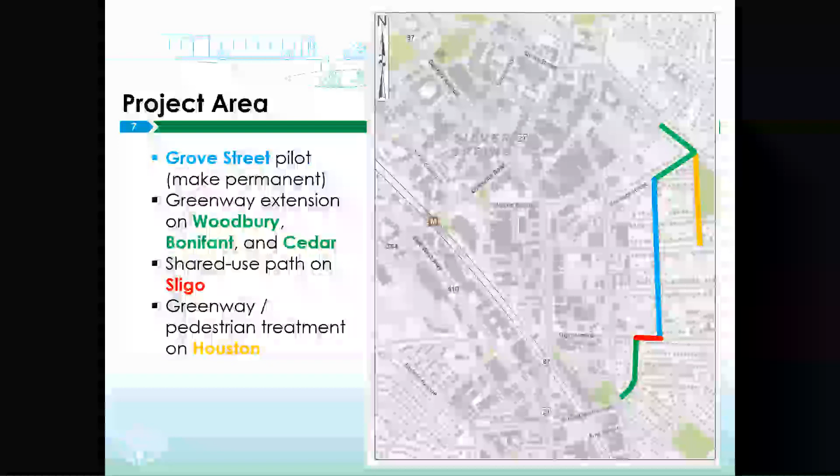And there's a segment along Sligo Avenue, which would be a shared use path, not a neighborhood greenway. It's part of the neighborhood greenway corridor, but it won't be a shared facility where you're biking in the street. You'll be on the side of the street.

And then we also have included a sidewalk along Houston Street based on comments that we have received throughout the length of this project. So I want to point out that this is part of a growing network in Silver Spring. This is not an isolated piece of the network, and this is not just a bike project, it's a bicycle and pedestrian project. But I want to talk about what's happening throughout Silver Spring.

So we already have a network of separated bike lanes and other facilities that have been built largely on the north side of downtown. You can see the Spring Street, Cedar Street separated bike lanes along the northern edge of downtown, which do connect at the north end of Cedar Street, in the neighborhood at least. And also the separated bike lanes along Wayne Avenue and 2nd Avenue that get you over towards Silver Spring Metro.

In addition to that, there are projects that are under construction. The Capitol Crescent Trail from Silver Spring Metro to Bethesda and the Silver Spring Green Trail, essentially from Whole Foods out to Sligo Creek, are being constructed as part of the Purple Line project. Those will provide off-street trails in the case of the Capitol Crescent Trail and separate right-of-way, and in the case of the Silver Spring Green Trail, next to Wayne Avenue.

And the Metropolitan Branch Trail, you can see at the bottom, from Silver Spring Metro down to Montgomery College, under construction, which will help to connect the existing segment of the Metropolitan Branch Trail, which is just at the very bottom of your screen, that solid line there, which goes down as far as the DC line. The Metropolitan Branch Trail will eventually provide an off-street connection all the way to Union Station in Washington, DC.

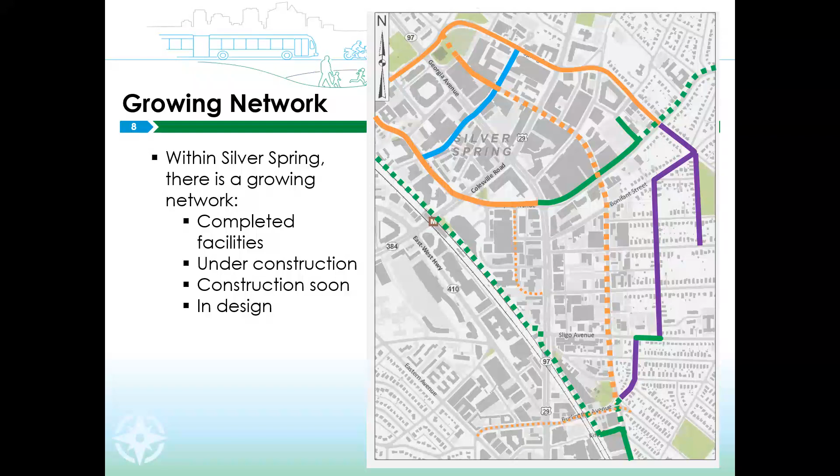And then we have some additional projects along Dixon Avenue and from Wayne Avenue down to Silver Spring Avenue, and along 13th Street and Burlington Avenue, which are in design, which will help to connect additional parts of downtown Silver Spring to the low-stress network that's being constructed.

So I see you're taking pictures.

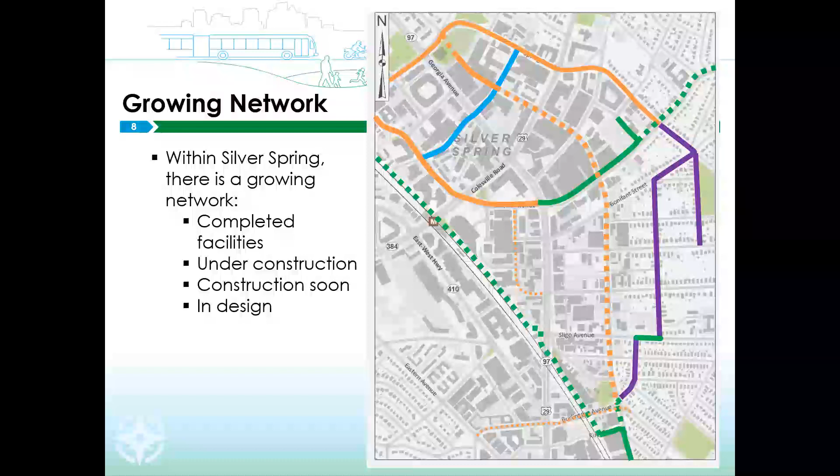That's great. These are all available on the webpage as well, so if you want to download later, you can get high resolution, but it's also not a problem to take pictures. That's kind of an overview of what's happening outside of the neighborhood and how this connects to it.

So a neighborhood greenway, what is it? You've seen this slide many times if you've been involved in these meetings. I always include it though, because we do have new people who join. A neighborhood greenway is a street designed to give walking and biking priority and reduce vehicle speed and volume. The tools we can use to create one include signs, pavement markings, speed countermeasures, and volume management measures to discourage cut-through trips by vehicles, and to create safe, convenient crossings of arterial streets for bicyclists and pedestrians.

Some of these elements you will be seeing as part of the East Silver Spring Neighborhood Greenway. And I apologize, every time someone joins this meeting, these meeting controls appear, and I can't do anything to stop that.

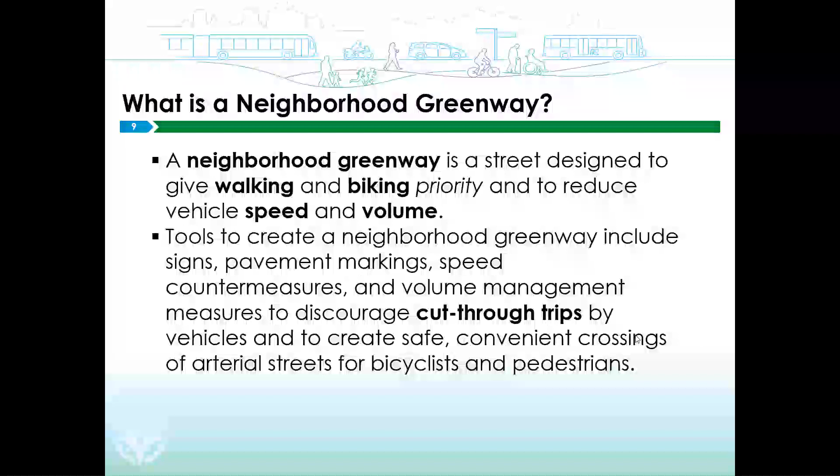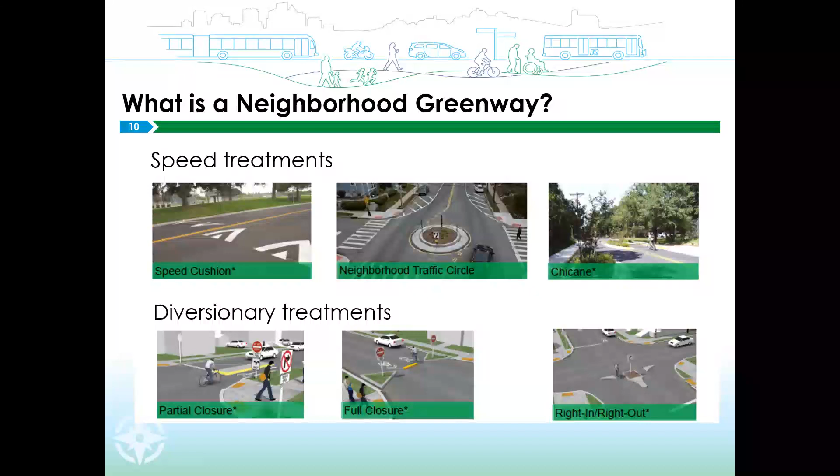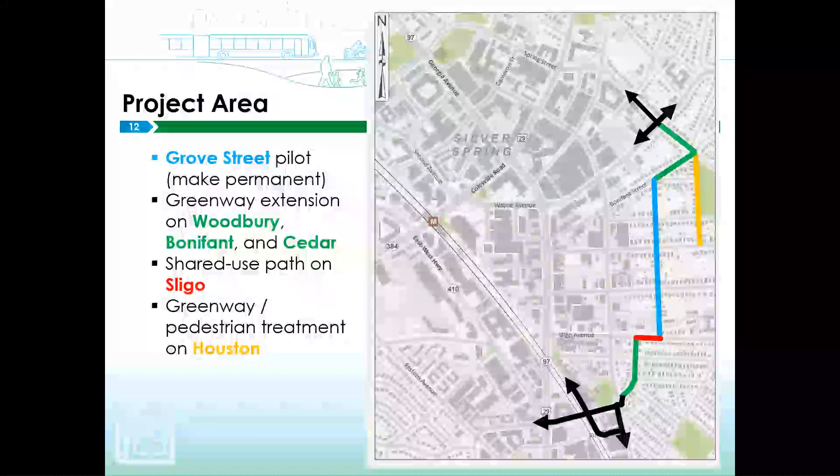As we go over what the project includes, here's the segment, illustrated in black, showing the connections at the south end to the Metropolitan Branch Trail and the Burlington Avenue Bikeway, and at the north end to the Silver Spring Green Trail and the Spring Street, Cedar Street separated bike lanes. I'm going to start at the south end of the project and walk our way north to go over what you're going to see.

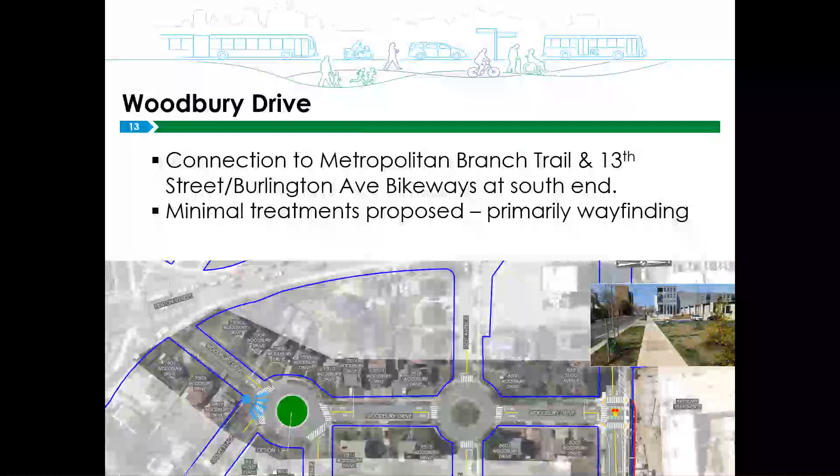All of these slide presentations are on our website, and all the display boards are on the website as well. But if you're here in the meeting, you can see those by walking over to your right side of the room and looking at those. And again, we'll be available to talk after the meeting.

So Woodbury Drive runs from Fenton Street up to Sligo Avenue here. It's about three short blocks. Mostly what we are proposing along Woodbury Drive are signage and wayfinding treatments—basically bike route signs and maybe some sharrows that help guide bicyclists through the neighborhood.

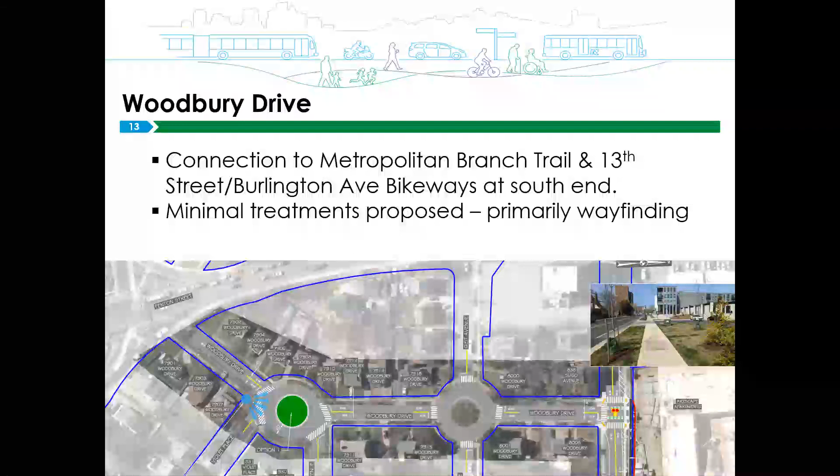We are proposing that the big open space at Violet and Woodbury and Richmond be converted into a circle to help rationalize that space and make it a little less chaotic. That's one of the options—we do have another option as well. So here is that potential circle treatment, made a little bigger for you on the screen.

You can see we still have plenty of space for drivers to circulate, but there would be a green space to help break that up. Right now, because the streets come in at different angles, it might be a little confusing for someone going north on Woodbury Drive who wants to continue on Woodbury Drive, while someone going south is turning onto Violet Place. It might be confusing as to where exactly you should position yourself, because you're coming in at different angles—it's just a big wide space.

We know from research that big wide open spaces encourage faster driving, and it's just not well marked. So we feel like a roundabout might be one way to help reduce the amount of space there that has pedestrians and cyclists open to exposure.

However, we have heard some people in the neighborhood who are not happy about the idea of a roundabout or circle there. So one alternative would be to take that space and, instead of putting the green space in the middle, put it on the edges, making it sort of like a normal street through here with two closely spaced intersections. We could potentially use the outside for stormwater management best practices. I want to point out that impervious surface is a major impediment to the health of places like Sligo Creek, because all that water that falls on pavement runs directly to the creek.

I know you may see it going to a storm sewer, but those storm sewers go directly to Sligo Creek. They don't go to Blue Plains to get treated. They just go downhill, so trying to treat that water and reducing the amount of water will help reduce erosion and will help reduce flooding events in Sligo Creek. I know this is just a small piece, but every little piece we can do helps reduce our impermeable surface. So that's one of the options.

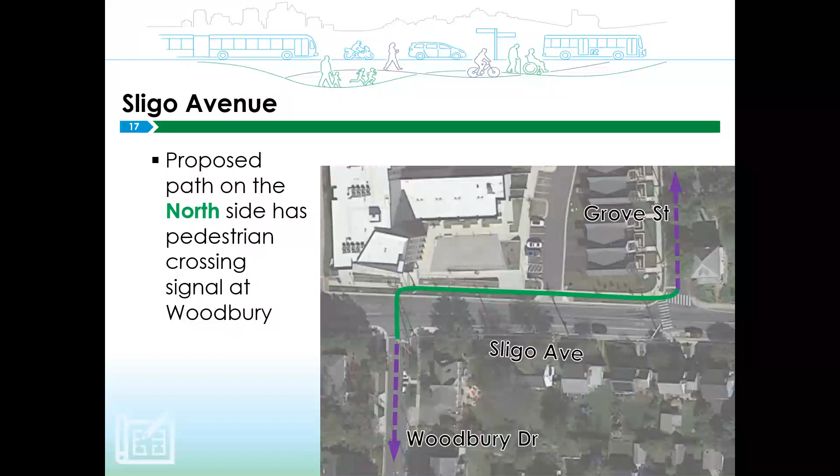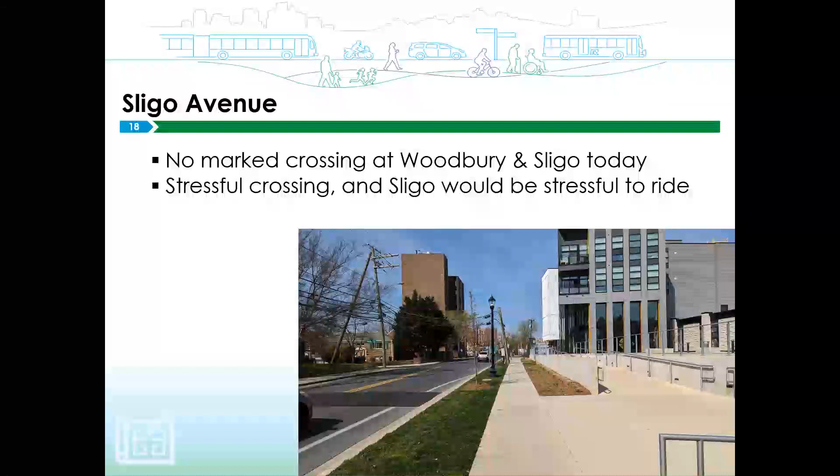And this is a picture that shows the existing condition along the north sidewalk. You can see we have the new ArtSpace development where the police department used to be, and a relatively narrow sidewalk on the north side of Sligo Avenue. We're proposing to widen that so there's enough space for cyclists and pedestrians to share to get between Grove Street and Woodbury. You can also see in the rendering there's a signal shown at Woodbury Drive.

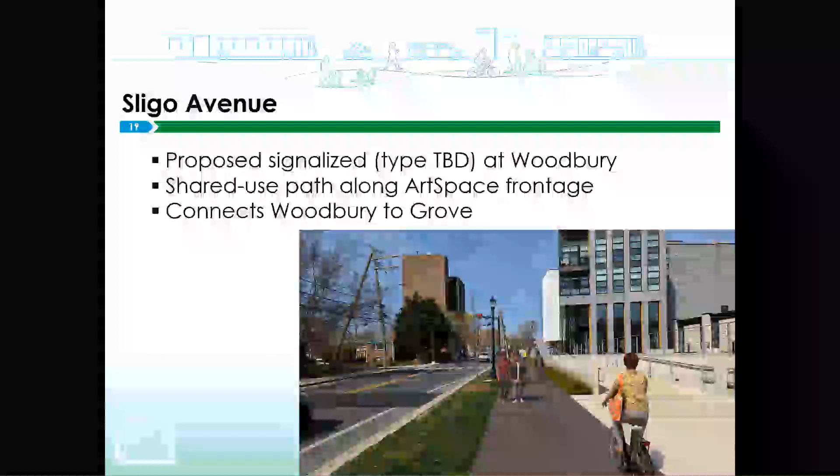As we move further north to Grove Street, we heard a lot of support for many of the treatments that were piloted there, especially the walking lane, which is very popular. So we're proposing to make the speed humps, the choker - there's one choker north of Easley Street - and the curb extensions on the side streets permanent. They're currently done with paint and flex posts on the east-west streets; we want to make those permanent and also create a permanent walking space.

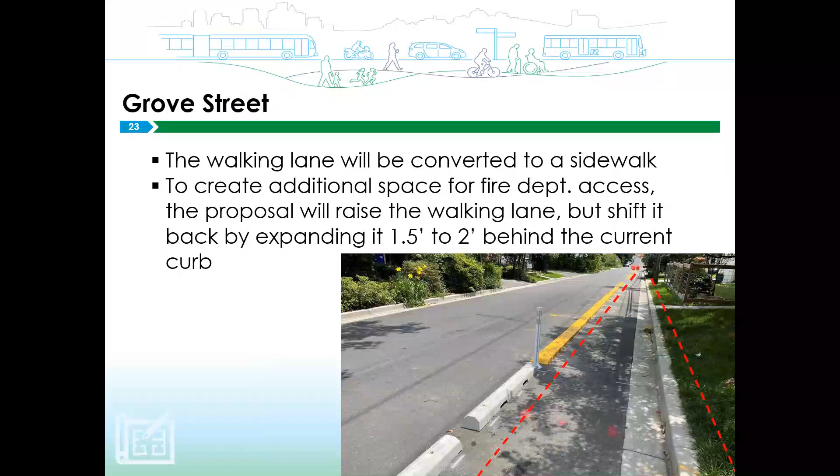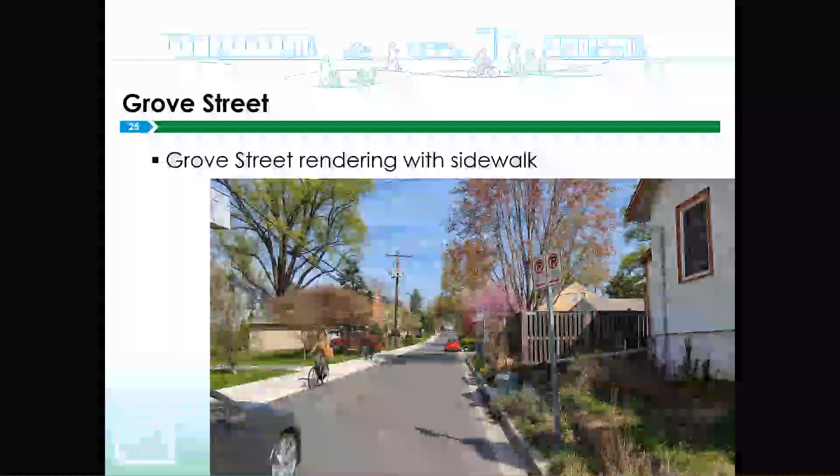But we'll have a raised sidewalk that is much harder for people to drive on than the current walking lane is. I won't say impossible, because where there's a will, there's a way, and SUVs make a lot of things possible. So this is just a rendering or a picture showing Grove Street as it is today. Well, not today because it's dark and cold, but at some point recently. And then a rendering showing what the sidewalk could look like on the west side of Grove Street.

As we move further north up to Bonifant Street, this is where we have the choker that I was mentioning here. The reason we installed the choker, which is currently paint and flex post, we're proposing to replace with concrete, is Grove Street's pretty narrow when there are parked cars. But when everyone's at work and there aren't any cars on Grove Street, it's wide enough that people can go pretty fast. And so the idea of the choker here is just to have at least one place where you have to slow down, yield to oncoming traffic if there is anyone coming southbound or northbound, depending on who gets there first. So it's just a way to kind of keep the street narrow even when there aren't parked cars there.

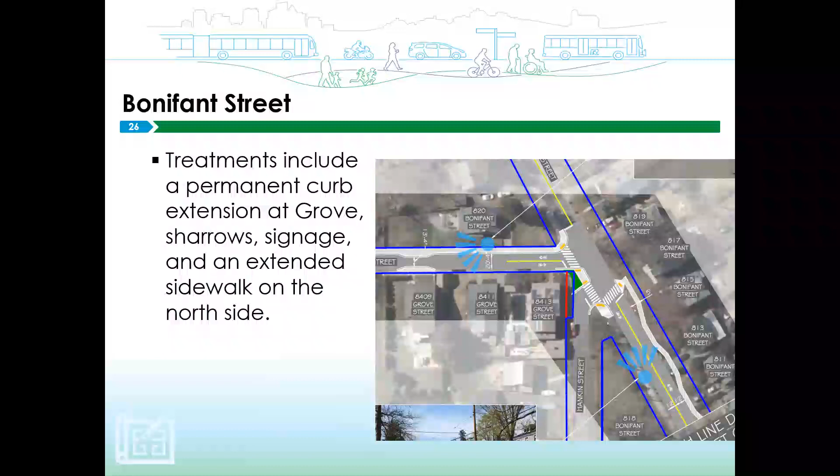We also are showing an extension of the northern sidewalk along Bonifant Street from where it currently ends, kind of mid-block, down to the intersection of Grove Street. We're not showing it continuing further west because there's a pretty big tree at the north end of Grove Street that we don't want to remove. And then we are proposing to make the bump out at Hankin and Grove and Bonifant permanent. And I have a rendering of it on the next slide here, so you can see what it looks like today. Before, this is all just wide open. And we did add the paint and flex post bump out here, curb extension here.

We have heard some people say, oh, well, people turning right drive through the crosswalk to get there. And I'm sure that does happen. That's part of the hazard of doing interim treatments, is it's a little harder to prevent either intentional or unintentional bad behavior. But by building a real curb extension there, it will become pretty clear that you're not supposed to drive there. Again, where there's a will, there's a way. Or I like to say I have 2 really amazing cats. Cars are like cats. If they fit, they sit. I'm sure you all live in an urban area. You're familiar with that. Wherever cars will fit, you'll find them parked.

So we have heard some concerns about people being able to turn from Grove onto Hankin. We've done some what's called AutoTURN analysis to show that it is possible. We understand those concerns, and if it's really a challenge for you, I would encourage you to drive around to Houston and come in Hankin that side, because this pedestrian exposure is really, really long. So if you're walking across it, it's a very long place to just feel like, hey, a car could just whip through here and not even see me. Especially on a night like tonight, it gets dark at 4:30, 5 o'clock in the winter.

I had to dress up. I'm wearing navy slacks and a black wool coat.

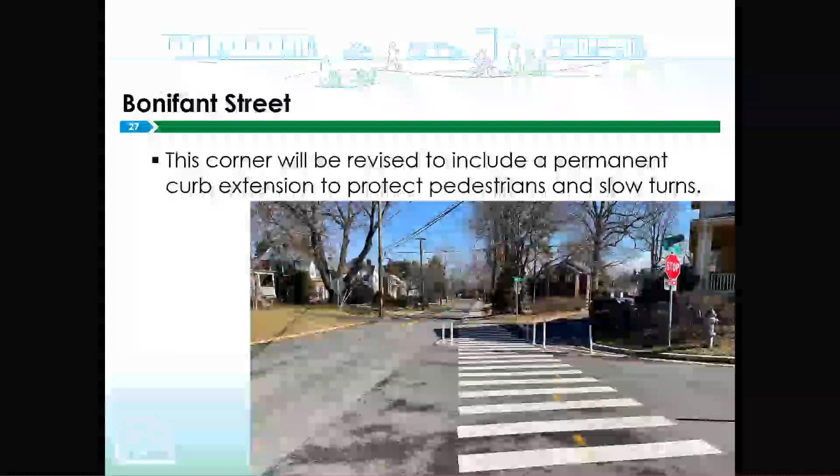I actually put my vest that I wear when I go out for field work, I put it on today because it's dark in some of these neighborhoods. And so that's a lot of exposure that we want to try and reduce.

As we get to the Bonifant Cedar intersection, this intersection is a very odd intersection with 5.5 legs if we count Dartmouth. And so we're proposing to put kind of an oblong roundabout. There's more space in this intersection than there is at the Silver Spring Grove intersection, so this one should function better. This will be a mountable, what we call an apron, a mountable apron. So trucks and buses would probably have to drive at least partway over this, but cars certainly wouldn't feel comfortable to do it. Of course, again, where there's a will, there's a way, you can.

But we have seen some bad behavior here, drivers running the stop sign, and the visibility here is really poor if you're coming down Bonifant. And so this is just meant to encourage people to at least slow down, hopefully stop, but at least slow down at this intersection. And so that's what we're proposing there. It'll be a little different than what you currently see at Grove and Silver Spring.

When we get to Cedar Street, we are proposing to flip the parking to the east side of the street. It's currently on the west side of the street. So the current setup is we have a northbound travel lane, then a southbound bike lane, and then northbound parking. And so that means if you're biking southbound on Cedar Street, you're kind of sandwiched between cars going the opposite direction from you, and it doesn't feel real comfortable.

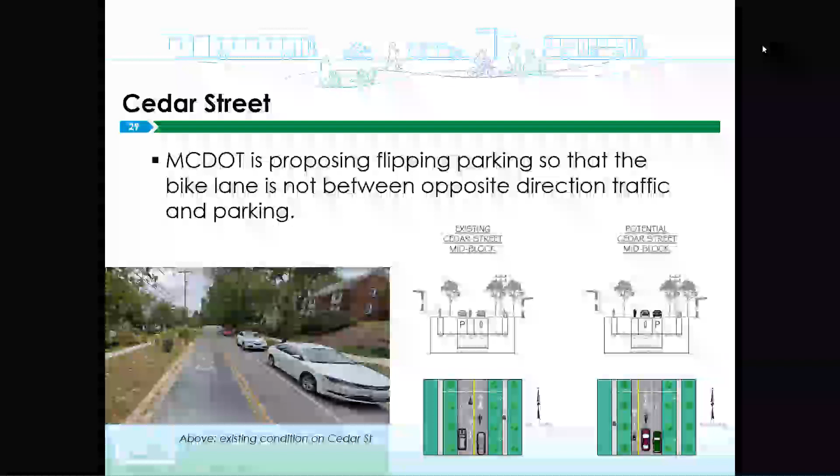But we think that there's some other benefits to doing this. So we are aware that there was recently a wrong way car crash earlier this month on this block of Cedar Street. We've heard that it's not just this particular accident, but that it's been a recurring problem. And so we think that flipping the parking and the bike lane will help somewhat. So this is a picture looking south on Cedar Street from Wayne Avenue.

If I were to put dimensions on here, what I'll show you is that we have an 11-foot northbound travel lane, and then a 5-foot southbound bike lane and a 7-foot northbound parking lane. And 5 plus 7 is 12, which means that center line is just slightly on the east side of halfway across the roadway. So if I go back to the previous slide where the dimensions aren't shown, if you're not looking carefully, that center line is right in the middle of the road, and it could very easily look like it's a two-way street. And this is exacerbated by the fact that this island is offset by 5 feet.

Now, why is that the case? Because 15 years ago when this bike lane was installed, originally it was supposed to be against the curb where we're proposing to put it now. And if that had been the case, the parking would have been on this side, and this would have been the center line right here, the left edge of that northbound travel lane. So the median would have lined up. The median was constructed, and then there was some opposition in the neighborhood, and we went back to the drawing board and did what was installed here. But that means the median was offset.

So we think that this might be contributing at least somewhat to the wrong way driving problem, at least for people who are doing it accidentally. Again, where there's a will, there's a way. We can't always stop people who are intentionally doing it the wrong way, but we think this might be part of the issue. Now, Wayne Avenue, it's not signposted, but it is a state highway. It's Maryland 594A.

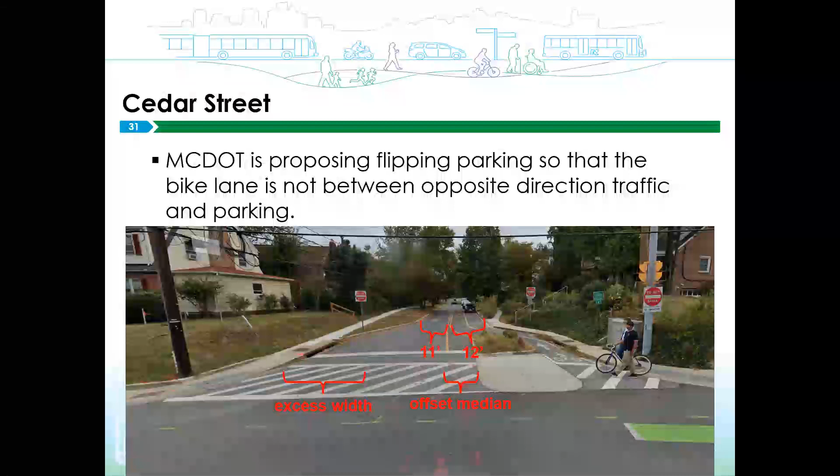But from the police report, it appears that the driver who crashed actually turned off of Wayne Avenue and did not go straight across from Cedar Street, from Silver Spring. They actually turned off of Wayne Avenue. So just for reference, they were not drunk, but they were on their phone. So remember, put the phone down when you're driving. You can always do the call later.

Now, one of the other things we think might help, and this is not shown here because we decided to work on this after hearing about this crash. This is very recent, but there's a big right turn bay that exists. I'll just go back so you can see there's a big right turn bay here. You can't turn right on red here anyway. We don't really need this right turn space.

So if we were to sort of fill this in so that there's the shadow of the parking lane, this becomes only 11 to 12 feet wide here, which is only one lane wide. It's going to be really clear that only one car is supposed to go here. I will say I live on a one-way street in DC. On my way to this meeting, I saw a driver going the wrong way down the street. So again, confused, you get honked at, he turned around, it's fine, it happens. But this will make it a lot less likely for this to happen.

Now, this is sort of a longer term item that probably will not happen as part of this project. I want to be candid because the purple line is impacting that curb line along Cedar. So we likely can't do any of this until after the purple line is completed, but we are going to talk to the purple line and see if there's any way possible to maybe modify that curb work. But there are some storm drains there, so it's not as simple as just going out there and doing it. So that is one complicating factor.

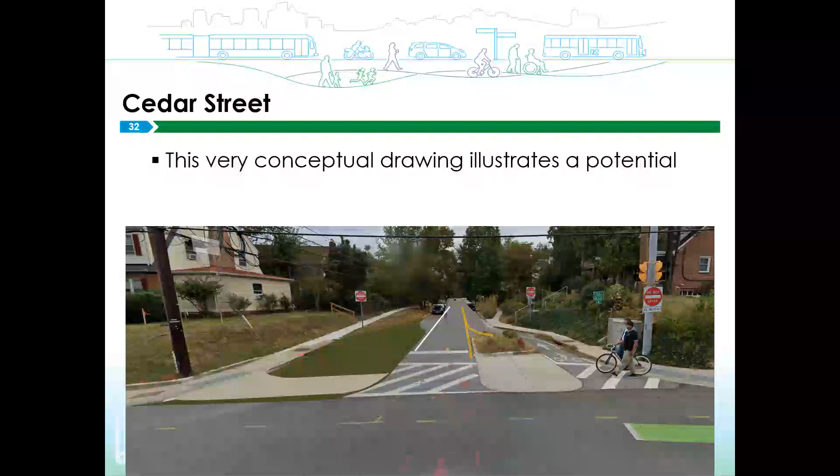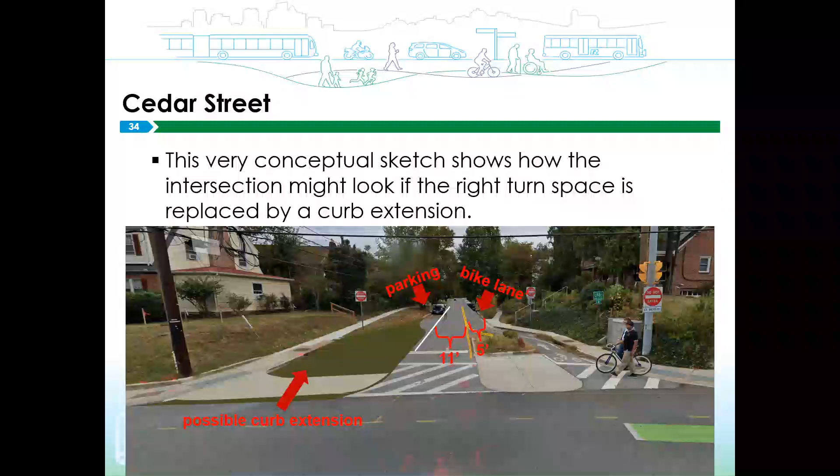But these are just some ideas that we have. Nothing is carved in stone. I did this in PowerPoint last week, so if you have comments or thoughts about this, please let's hear them because it's not set in stone clearly. And this is just kind of illustrating what I was just talking about, in case it wasn't clear. And then we move on to Houston Street.

Houston Street, the main treatment here is to add a sidewalk along the west side of Houston Street. I just want to point out that one of the reasons Houston Street was included was when the Grove Street pilot happened, we did traffic counts on Grove and Houston and Fenton and all the east-west streets. There was a huge decrease in traffic on Grove Street. And those of you on Grove, I'm sure, noticed that. I see we have, I don't know what we call it, a fist bump from one of the neighbors here.

We did see an increase, however, on Houston. Now, the increase on Houston was much less than the decrease on Grove. So most of the traffic just disappeared, but some of the traffic went to Houston. We heard from people on Houston who said, you're just pushing the problem over here, and we don't have a sidewalk either, so we're planning to build a sidewalk here. Because our goal is not to just push the problem somewhere else. The goal is to try and solve the problems, or at least address them as best we can.

So that's pretty much what we're talking about with this project. Again, nothing set in stone. We want to hear your comments and your feedback.

So what's the next step? Based on the feedback that we hope to get, we will work to revise these plans. And we want to start construction on as much of this as we can, as soon as we can.

Part of that, I don't want to sugarcoat things, is because the treatments on Grove Street are pilots. They're not designed to be long-term, and they are not particularly snowplow proof. Now, we've been lucky. The last 3 years we haven't had any major snow events. I'm knocking on wood. They're saying it's supposed to be a pretty snowy winter this year.

So the treatments that we put on Grove were custom built. They're very expensive, and there's a lead time. If they were to get ripped out by a snowplow and I was to order them in April, we probably wouldn't have them until November anyway, which we might be able to get to construction by then. So if we lose any elements of the temporary pilot project during this winter, it's unlikely that they'll be replaced because the lead time to replace them is a while.

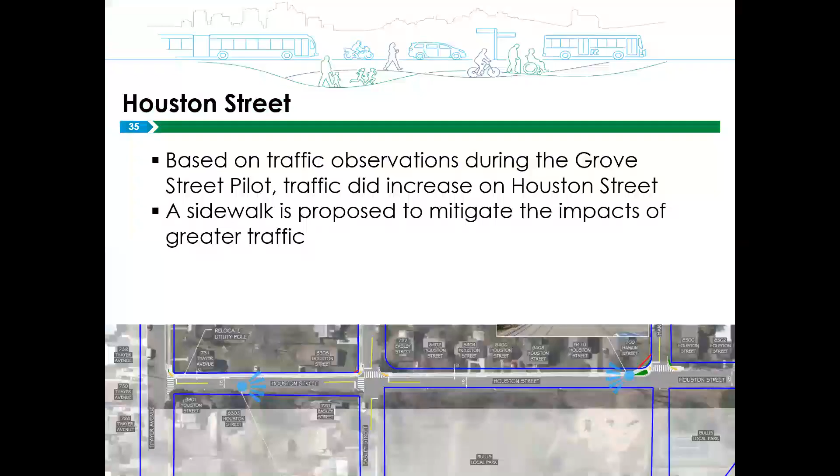So that was the first question. Are there any in the room? Yes, right here. Yes, I can go back to that slide. Right about here, there we go. Okay. Yep.

So the question, for those of you on the Zoom and in case anyone in the room didn't hear it, is about these curb extensions or bump outs that are paint and flex post - not the roundabout, but on the edge here, you can kind of see one here. What is the purpose of these? That's the question.

The purpose of these - there are two purposes. The first is to narrow the intersection at the crosswalk location to reduce what we call exposure. Exposure is how much distance, as a pedestrian, you are exposed to traffic while you're crossing the street.

So if we have a 2-lane street, the exposure is probably going to be somewhere in the neighborhood of 24 feet, because we have 12-foot travel lanes, 2 of them, that's 24 feet. But if you have parking, there's another 8 feet on each side. So now we've gone from 24 feet to... 40 feet, I think.

That 40 feet is a lot of exposure. There's no one parked in the crosswalk, but we typically just have the curb go straight. You're right, there's no parking there, but you still have to cross that expanse of asphalt, even though no one is parked there. So that's additional exposure.

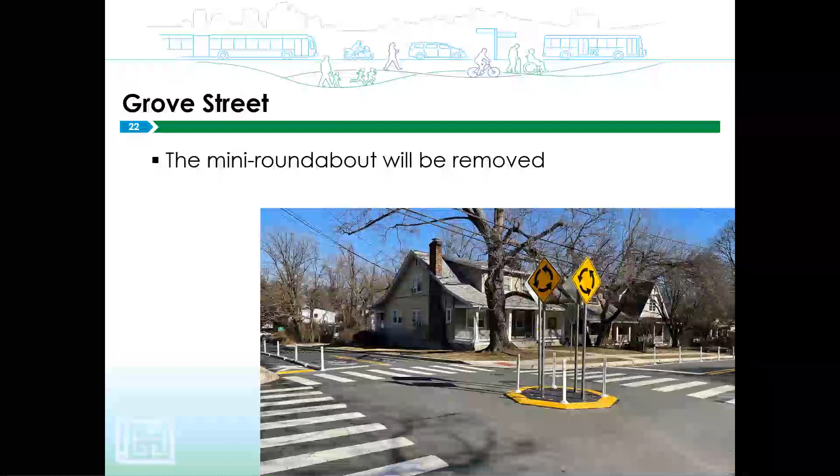This intersection came to being as it is today in 1960, just for a history lesson. Fenton Street used to end at Sligo Avenue, and it was extended in 1960 down to Philadelphia Avenue, which used to go straight across. This part of Fenton actually used to be called Woodbury also—Woodbury Drive used to continue down to what's now Montgomery College. It's now called Fenton Street. So that's why this intersection looks like this. It used to be a very weird intersection with a roundabout and five legs, then it got a sixth leg, and two of the legs were removed, so now it's a four-way intersection. That math works, trust me. I'm sure you can do it.

So we're dramatically improving this connection and the intersection to improve safety here, and we hope that will go to construction next summer. It's almost 8 o'clock.

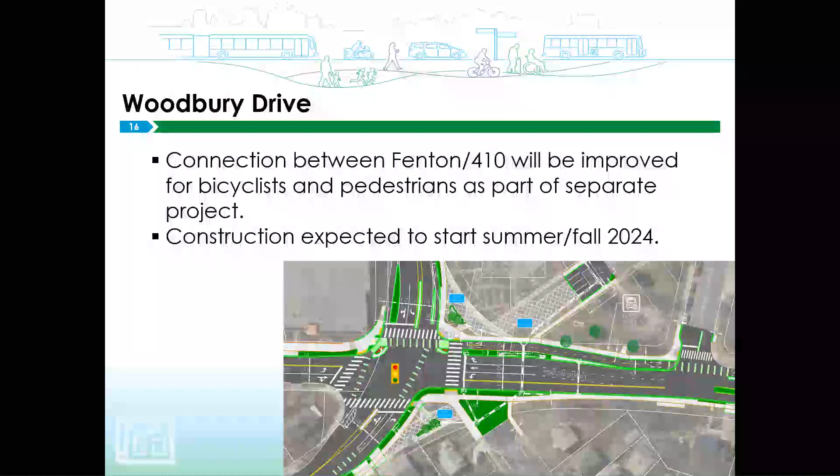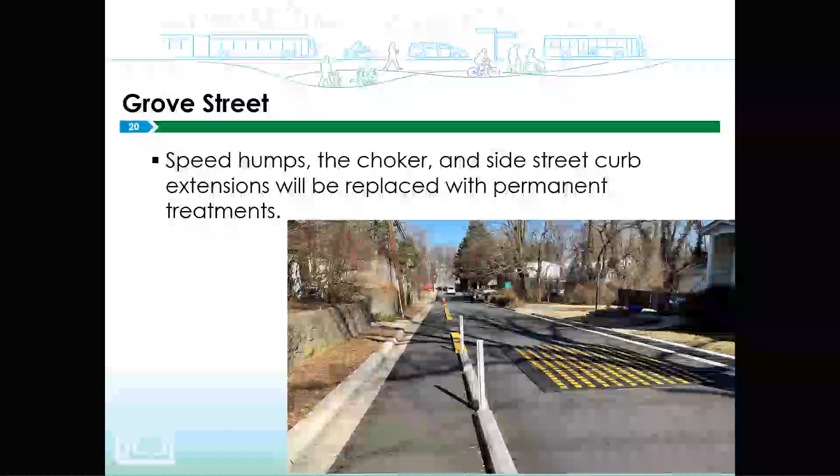I was trying to see if I had an image of that. I don't have that graphic here in this presentation, but yeah. So the question is—I forget the house number—basically, on the south side of Sligo Avenue between Woodbury and Grove, there are some single-family houses, and we're proposing a concrete bump out just west of the intersection with Grove. I believe we added that mainly to improve visibility for that crosswalk and the bus stop that's there. The comment is that it's going to remove parking from those houses, and parking is already really tight there. That's a great comment. Like I said, nothing's carved in stone, so we'd love to hear more from you—put that in writing and we'll take a look at it.

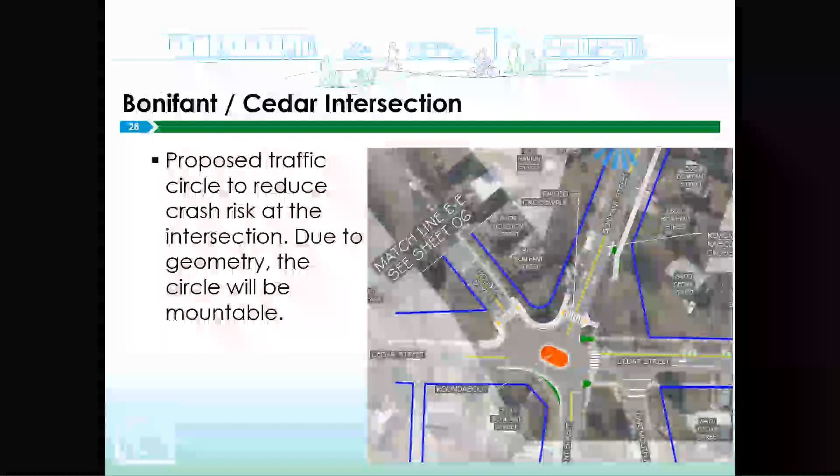The question is, would either the circle or non-circle alternative for the Woodbury, Violet, Richmond intersection add stop signs for the approaches? The non-circle alternative, we are showing stop bars and stop signs. I would imagine we probably wouldn't put a stop sign for the interior intersections, but we can certainly discuss that.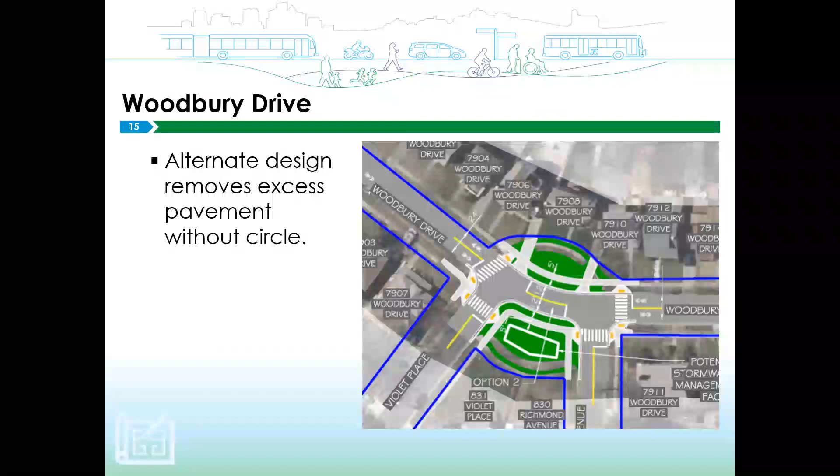For the circle, the intent is still to have stop signs, even though it's a circle. Not all circles are yield circles — we could stop and then circulate. So the intent is to have stop signs on all those legs, but we want to get those comments. I'll take one more question since we didn't get one from the Zoom.

Yeah, right here. The question and comment is: this person is in favor of the new sidewalk on Houston Street, but how does adding a sidewalk address the traffic change on Houston Street, the traffic that was added there?

What I'd say is that the additional traffic on Houston Street is pretty small. I know if you live on Houston Street it doesn't feel small, but it's only about 200 cars per day on average, which is still a decent amount. The main reason for proposing a sidewalk was that was the big thing we heard from most Houston Street residents — hey, we need a sidewalk.

It's not that the sidewalk is intended to get cars off of Houston Street. The intent is to give pedestrians a place to walk that's not with all these additional cars. So the purpose of the sidewalk isn't to get cars off Houston Street, it's to allow pedestrians to walk away from all those new cars.

Hopefully over time the traffic will stabilize with these new treatments. Ideally we don't want people cutting through the neighborhood, but they are public streets, and a lot of that traffic we weren't able to track as part of our survey — we couldn't tell where those cars came from. Some of those people may already live in East Silver Spring and stopped using Grove Street and started using Houston Street instead, so they might not really be cut-through traffic. They could be going from DC to Columbia or something, but it's hard to tell.